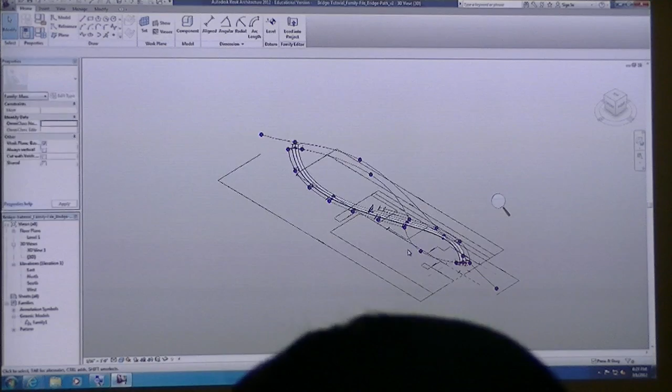Where are your dimensions? That's what I can't get because Y and Z. Oh, like this point, when you first started out. Sometimes, yeah, I guess it's. Like I think all my other points are right and everything. I don't know what's going on. It's just like when I place the point anywhere on the line, it's not working. Yeah, like it just went crazy.

Thank you, great. When you dimension, are you dimensioning to the point or the plane? To the point. You have to dimension to the perpendicular plane. But if I delete these, oh no, when I do those dimensions out, when I did these, it was to the point, yeah, but when I did the actual... Yeah, so you're gonna have to get rid of those. Okay, because right now it's driving, this reference spline is driving that geometry. And it's forcing all of these to also be perpendicular to the spline.

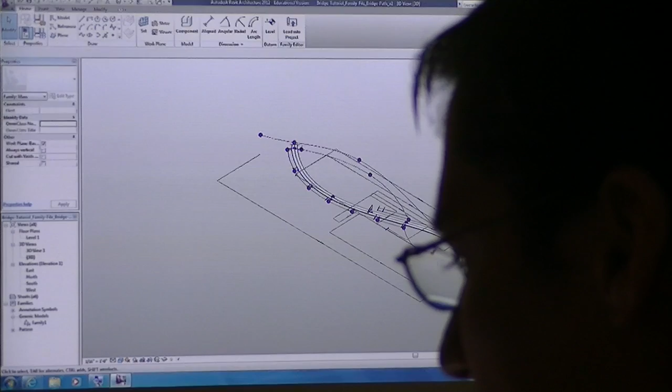Okay, but before you even do this part, every year. I know you, they need to go back and make sure all the dimensions that are being defined as a set of parameters are actually going to the vertical and horizontal planes of the point. Those are going right, but these, just the overall dimensions, those will still be positive, those are going right. So should I just delete those? No, nothing should go to the point.

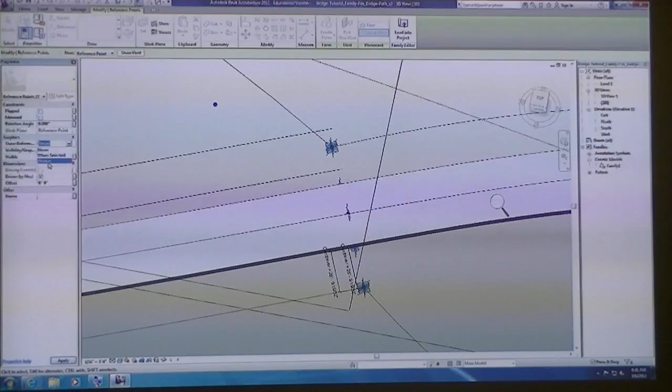Turn on my always option. You have to always be dimensioning to those planes of the point, not the point itself. If you dimension to the point itself, it's going to allow your point to rotate once a piece of geometry, like your section curve or section bridge, starts to sweep across the surface, forcing rotation of that point. Otherwise, if you dimension to the planes, those planes will always stay in the X and Y axes.

So if you're running into problems with a twisting form, or you're getting error messages about constraints not being satisfied or needing to remove constraints, it's a dimensioning error.

Is there a way to fix it after the dimensions? Yes, you can, with any dimension line.

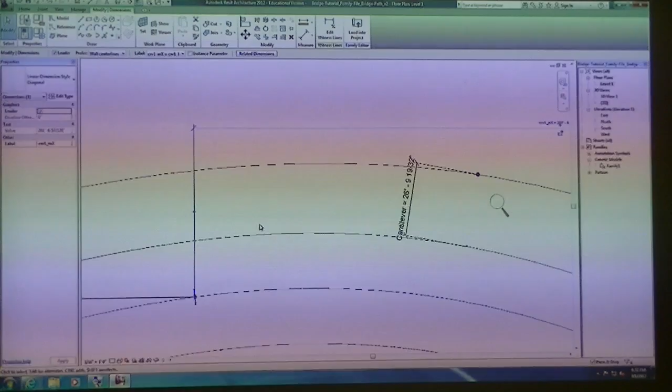If you select a dimension string, you'll see this little point in the middle of one of the extensions. You can drag that and rehost it to a particular plane or point or whatever you're trying to dimension to. If you don't see that handle, like over here, take one of these and drag it, and you'll see that handle again in the middle, letting you redo the dimension.

You can also click on a dimension, and if you right click on that same point, if you had multiple dimensions on a string—though in most cases we only have one dimension per string—you can delete witness lines. The witness lines are considered dimensions. Or you could click on a dimension string and click edit witness line, which allows you to add more dimensions to that string. But to add a parameter to a dimension string, it has to be a single dimension—you can't have multiple dimensions on a string and then try to add a parameter. It won't work.

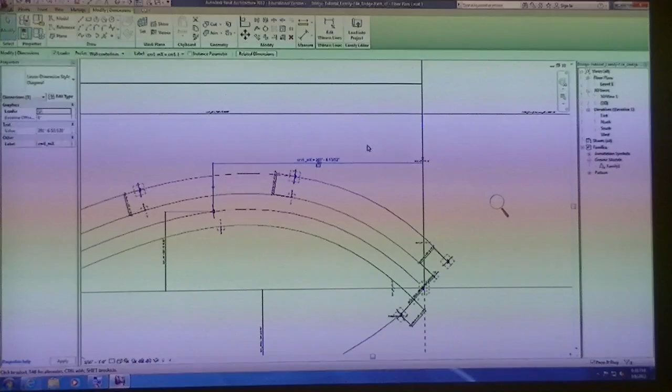I'm going to reload this just in case.

So this file is kind of where we left off last time, but I've completed our exercise. Last time we created these 4 points and made a reference line spline through them with an offset equal to a parameter called cantilever. I then added another curve with more points, since it was a lot longer and needed more than 4 points to work. All of those are set up the same way, with that offset set to cantilever.

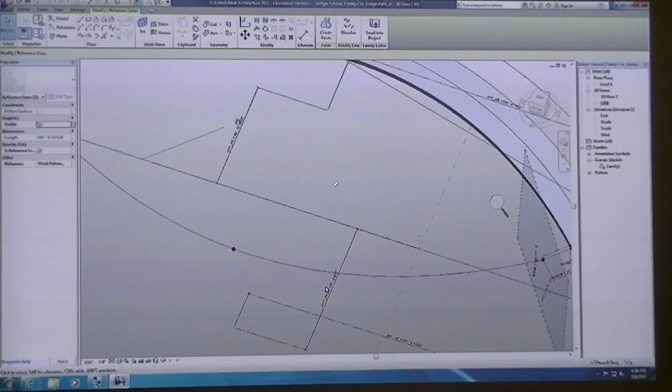Then I made another set of curves by placing 3 more points, and added some parameters to all of these points that have to do with how I want this to actually look, kind of like a crossbow.

And I've got another set of points going in the Z direction. They're all along the main reference axis. If we look at level 1, this horizontal plane, those points going across the top—there are basically 5 points—form a curve that goes up and above the bridge.

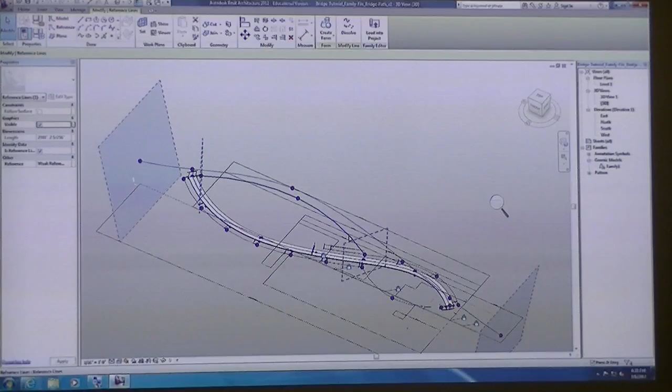All I did with those is create more points and add more parameters. So every way we created the points associated with this bridge, I did the same thing with all of these points: placing new points, adding dimensions, and then a set of parameters to define their location. I'm not going to go into each one specifically, but they all reference some relative position on the bridge—either the bridge spot elevation, the starting point, a midpoint, or some other hosted point already established.

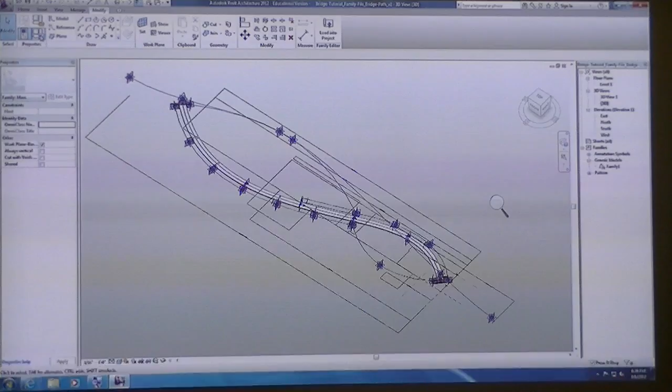This way, if you click on your dialog box and change the bridge length—right now it's set to 1600—you just type in 2000, and everything should grow and expand relative to one another. We can also just go a lot smaller here.

All right, so what I want to go over today is how we're going to complete this bridge. I've got a set of adaptive structural components that we're going to place—not all of them, just get them started. Then I'm going to go over the actual funky foam form, like you have on your bridge, and how to place that, along with a couple different ideas that might help you out.

If you've downloaded all the other files for today's class, go into recent files and open them up. I have 2 files: one called adaptive V structure and adaptive box structure. Let's go ahead and open both. I'm going to open up the box, then go back to view, user interface, recent files, and open adaptive V.

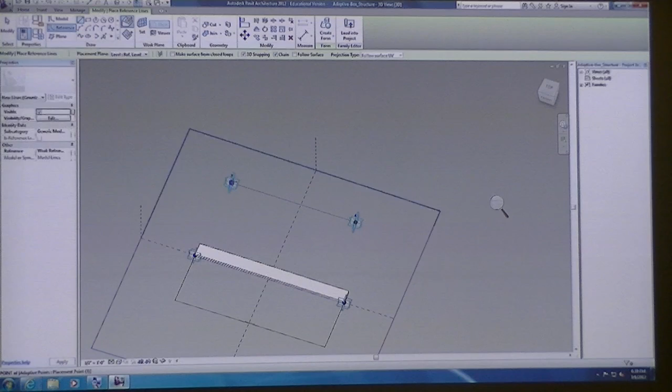Then once I had that line, I just said create form solid. Once you have a solid form, instead of making this into a complete solid, I was having trouble getting all the adaptive points to go around the perimeter and do an extrusion. So I actually made this solid by a series of faces.

Once you make a face, what I did here is I extruded this up, and you can then tab over and select one of the edges and say create form again. I can do the same thing, and of course this one I can change the direction of it from your positive and negative offsets.

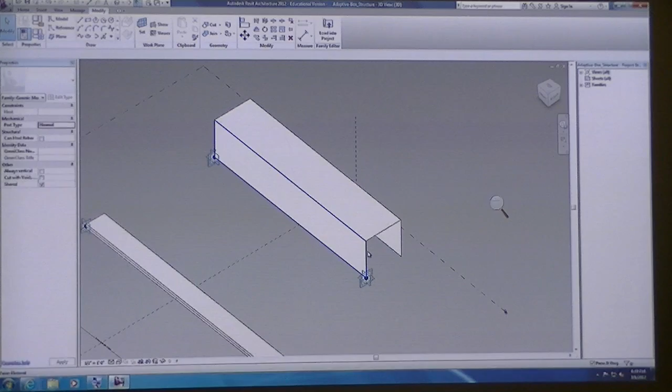Number lock. And so I basically completed the whole entire form by doing this, and then to close it off, you just select both.

Now you'll see that when I selected both of these edges, I now have these 3 thumbnails that popped up. They both look like pipes, but the last one's a flat plane. I'm not sure what the difference is between the first 2.

And then I did the same thing to close it off. So I basically made this whole box in a series of faces, kind of like you might do in SketchUp or even in Rhino from time to time to make that solid.

I'm going to delete all that.

The next thing I did is I took a dimension line, and did a dimension from point to point. Remember, I just got done saying you have to dimension to the planes of a point. Well, in adaptive components, you have to dimension to the point itself, because adaptive components will be rotating. Those points will be rotating, so we can't force it into locking into those perpendicular planes.

So I actually snapped to the center of each of these points, and set a few parameters up. One of these is called structure width, length, and depth. I also added a material parameter. But one of these parameters, and they're actually all defaults, meaning they're all instance parameters.

One of them is a reporting parameter called structure length. And that's what you see highlighted, and is actually reporting what the length of this structural element is going to be from point to point.

The reason I did that is I want a parameter set so that the size of this box is being developed by the overall length of this beam. You all remember from structural classes, or even just in studio when you're trying to show some realism to your projects, there's one of those magic formulas where you take the overall length of how far you're spanning a beam.

You convert it into inches, and then add 2 inches or subtract 2 inches, or some kind of rule that gives you a general depth of what a beam might look like realistically, so you don't have to do all the structural calculations. So that's what I set up here.

I basically just say structure length divided by 12. That makes the depth, turning this from feet to inches. And then I did my structural width. I just came up with some obscure multiplication of 0.175 that gave me a particular thickness or width to the beam that I wanted.

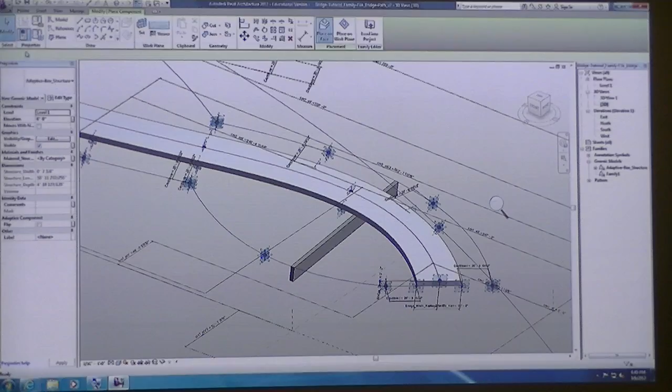Would it always do it perpendicular? It's going to be, when you start to snap this to the different points, it won't exactly be perpendicular. It looks like it is, but from time to time, especially when we get to this next adaptive component, you'll see that you may have to hover over the adaptive point, and then you can move it by dragging it.

Or you can also move it by your normalized curve parameter. So right now that point's located at 0.57. I could type in 0.6. So if you need to make any adjustments once you actually get this component placed, you can just tab over and find those points and then move them.

Now once we have one of those placed, we can hold in the control button and select or hover over that item and then just drag. By holding in that control button, you're basically dragging and dropping each of these, or sliding them up and down the different reference lines.

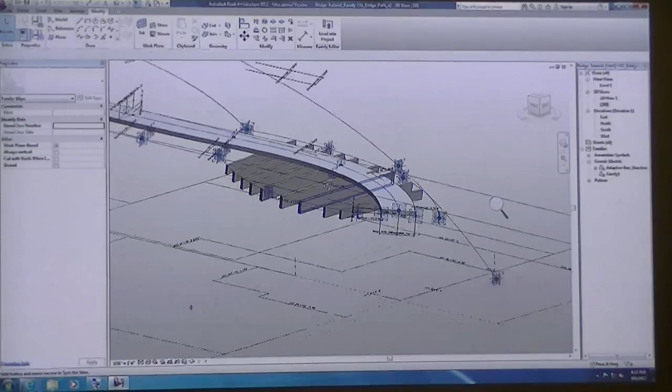If my beam is connected on the bottom and kind of goes across like yours is on the bottom, but mine is connected by the top.

Okay, so you can click on the beam, and under adaptive component, you can hit flip. It probably had to do with the order that you snapped.

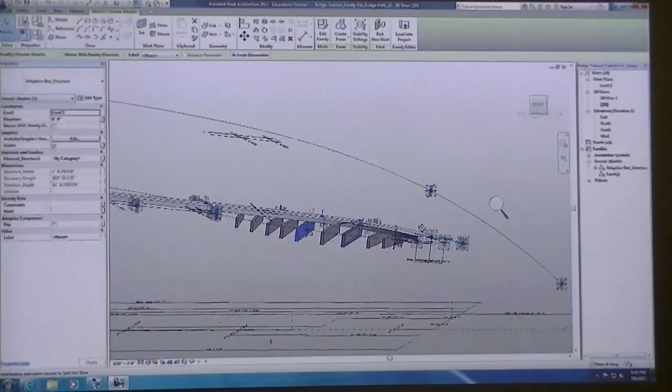And so when you kind of rotate around, you should see that as the beam starts to span less, the depth is also changing. So all the depths are not exactly equal, and that's because of that reporting parameter.

Now you might say, well, so I can drag all these, but how do I actually get them kind of equal, and try to have some sort of logic to their spacing? Once you actually place an adaptive component...

If you go into a floor plan view, while we're in the floor plan view, also highlight level 1 in the project browser, and then under view range hit edit. Change everything to unlimited except for the cut plane. Let's go ahead and just make that like 2,000 feet, just to make sure we're well above.

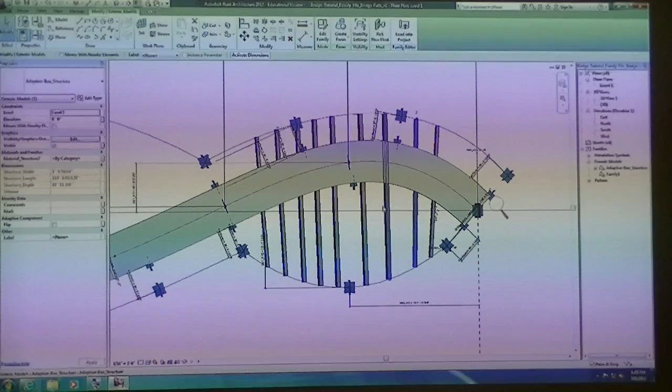And if you don't like the thickness of how far these beams are going in depth, and also how wide they're getting, you can just go back in and adjust the formulas that I have within the adaptive component. I kind of think they're a little thick right now, but we'll worry about that later.

So once you've actually placed these beams, what we can do is draw in the floor plan a series of reference planes. So under the top here, click on plane, and we're going to draw a line.

And I'm going to snap to the endpoint and draw a vertical line. I'm basically going to make a series of guides. The next plane I draw, I'm going to snap to the other end. I'm going to call these kind of my construction lines right now.

What points are you selecting? I'm just snapping to the endpoints of this curve.

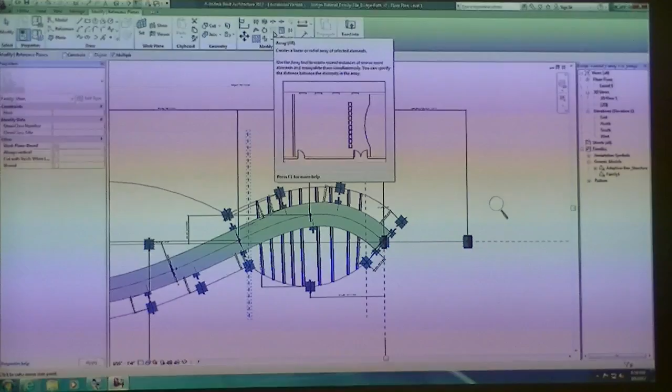And then if you take one of those planes, I'm going to copy it. So hit modify and copy, and then make sure multiple is selected. You cannot array a series of reference planes or reference lines, so that's why it's grayed out. Unfortunately we have to do this by doing a copy and multiple.

And I'm going to copy a whole series of these. I don't really care what the distance is at the moment between them. And then if you dimension to each one of them with the align dimension tool, when you're done, you can just click on equal, and it'll make it equal, equal, equal.

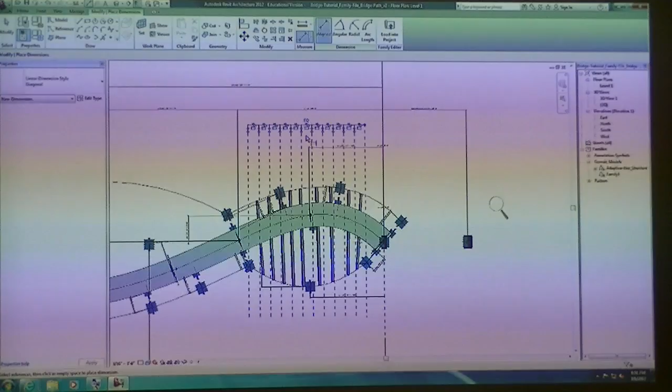Now, I'm not going to do all of these beams, but once you set up this adaptive structure, you're going to have to do a little bit of work in creating your alignments correct, or the way that you would like to see them in your design. So I would like all of my beams to actually be vertical in this plan view.

Since when I drag my adaptive component, basically it's trying to connect the normalized curve parameter value equal on each side of the curves, and because my curves are different lengths, that's why you end up with your adaptive component starting to kink to one side or the other, because it's trying to connect the 0.78, and this one's probably, well, that one's 0.95, but it's trying to be close anyway.

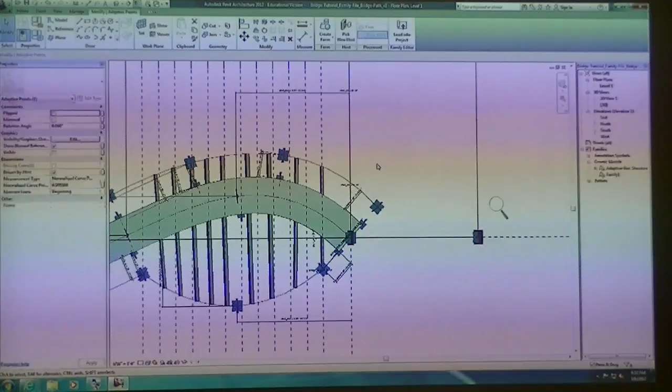But once I have that, what I can do is I have these reference planes as a guide. I can then drag the point. I have to tab over to select that adaptive point. And I can get it fairly close to the location I'd like to see it in. Once you have this hosted and it's actually connected to these reference lines, no matter how your bridge ends up changing, it's always going to remember the normalized curve parameter value of where those adaptive points are located. And so those beams will always be at those locations once you have them set.

I'm just going to do one more here so you can see. So I tabbed over, I selected the point of the adaptive, and I'm just, you can't really snap to the intersection of these planes, but I can at least eyeball it and get it fairly close. And you can also use your cursor keys, left and right, to move the point if you just want to nudge it over a little bit here and there.

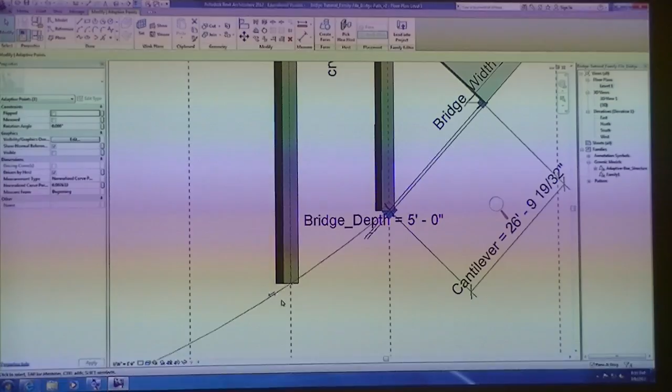So anyway, you kind of get the idea there. You can determine how many beams you want. These reference planes, they're just there for this alignment exercise. Once we're done, we can select them all and delete them. They're not really serving a purpose other than a visual overlay at the moment.

But if we go back into our 3D view, I want to go ahead and place these other adaptive components. So I might hit save. And I'm going to flip over into the component called adaptive V structure.

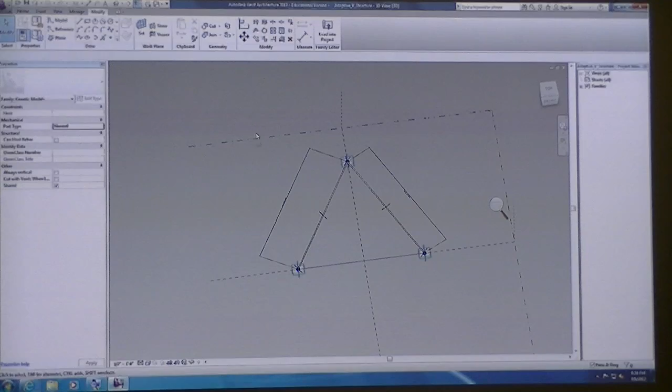And I could have made this all into one component. I might try that again, but I was having some difficulty with the beam versus this component and getting it to flip in the right direction. So that's why I made them into separate components. So you may have to kind of break down your structure a little bit to get it to work correctly.

For some reason, when I actually had the beam down here, when it got placed onto the bridge, the beam part flipped up above the bridge, but then my V was still upright as well, and I could never get it to flip correctly. So that's why it's broken up this way. So adaptive components, they're not perfect, but we have to find a way to work around them.

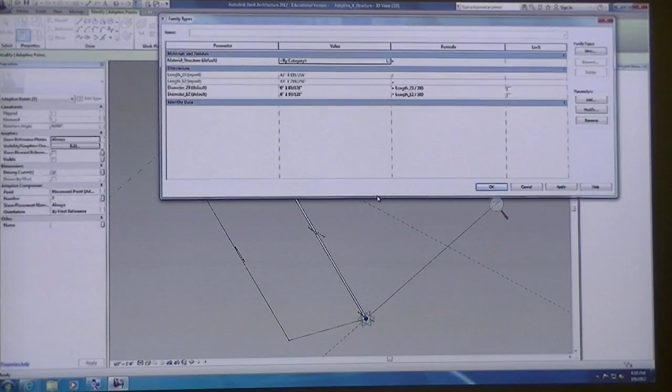This particular structure is set up like basically a series of cables that are moving from 3 adaptive points. So I made a triangle, and there's a series of dimensions here as well. They're all reporting, there's 2 reporting dimensions and 2 instance dimensions. I'm basically finding the length, the overall length between each of these points. So point 1 to 2 and 2 to 3.

That then determines the thickness, or the actual radius of the pipe. So if you look, I actually called it diameter. It should really be called radius. But anyway, there's a parameter here that's set to the actual thickness or the dimension of that pipe. So basically, as the length changes, the thickness of the pipe should also change as well, just for some more variation. We can go ahead and load that into the project.

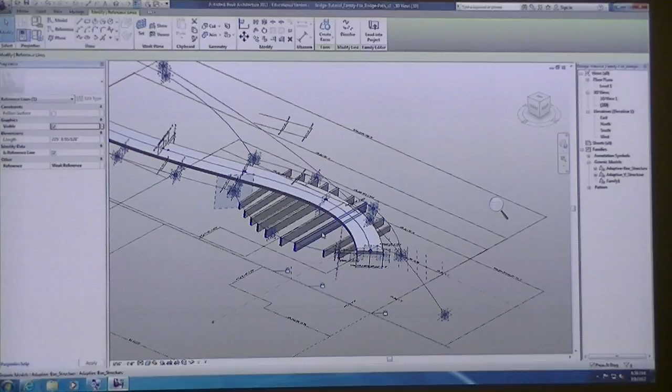If we click into a 3D view, basically what we want to do is we're going to connect those 2 reference lines that we just connected with our adaptive structure beam, that box beam, but we're also going to include the wire that's up high as that center point. So I'm clicking on Place Component, and because we now have more than one component selected...

If you click on that kind of big button off to the top left under Properties, you'll get a pull-down menu now that shows you all of your different components that you've loaded and what you can place. So I'm going to make sure I have adaptive V structure. And the order is, we need a low point. So I'm picking a point here on this kind of bow. And then I'm picking another point up high. And then I'm picking a point on the other side.

And so this works in the same way. Once we place one adaptive component, you can actually just hover over it, hit Control, and then continue to slide this.

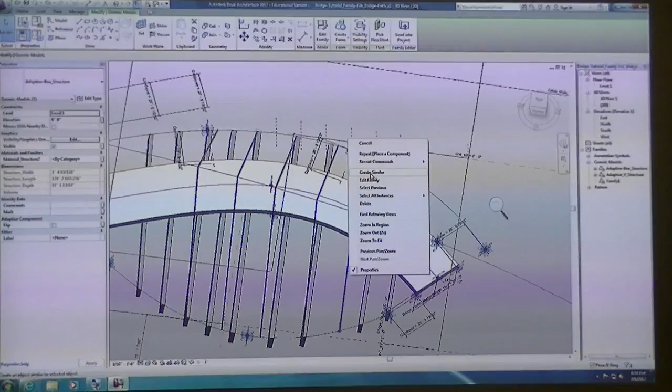Now what I probably should have done is, if we had all of our beams set exactly how you wanted them, you know, gone through the whole exercise and aligned all your beams to be vertical in the plan view. When I place an adaptive component, I'll right click on one of these and say create similar, just so I can make another one. I could actually snap to the point of another adaptive component, so I could snap to that, then up here, and then down on the other side.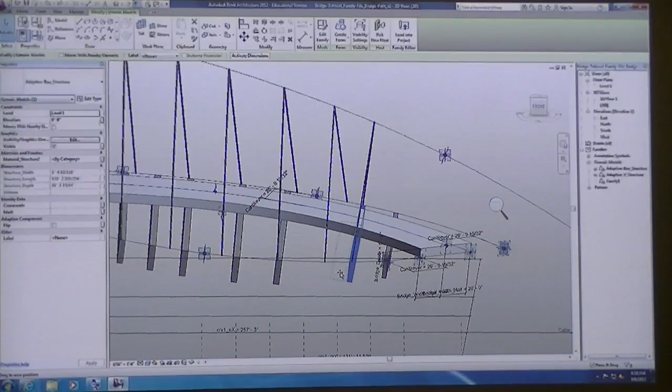At least it'll be aligned to all that work you just did to get the other beams aligned. It doesn't form a connection between the adaptive components though. The adaptive components always form a connection to those reference lines. So you can see after I snap to those points, if I drag the beam, the other adaptive component doesn't move with it, because these points are being hosted by those reference lines.

So that's a quick and easy way to add some tectonic structure to your path, so it has some realism of something holding up this curvy path that's spanning close to 2,000 feet across a waterway. I chose to make an arc above and have a suspension bridge. I could have also had an adaptive or reference plane underneath, with structure coming up from below. You can decide how you want your structure.

I think I emailed you guys some images. I don't know if you got it, but just some quick inspiration from an internet search on complex bridges. You can see some of the forms. Let me load one up real quick. That was kind of my inspiration for what we're going for here.

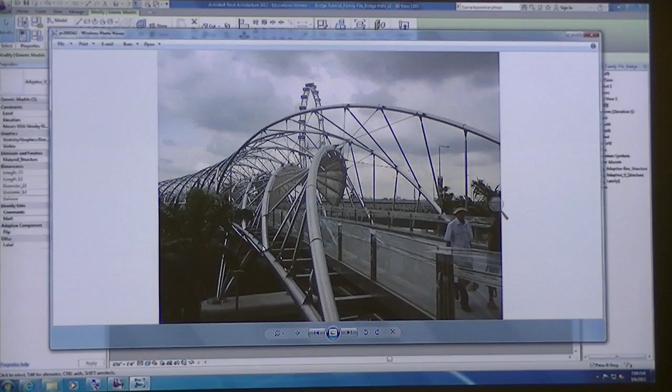Obviously this one's a little more complex, a lot more parts and pieces, but it's pretty nice, has some glass panels in there eventually. Then you can also see there's structure underneath. So you can get as elaborate as you want to.

So you guys can get as creative as you want, but as long as you follow the rules with the adaptive points and making all these different components, as long as you have these reference lines, you can add as many of these structures as you want.

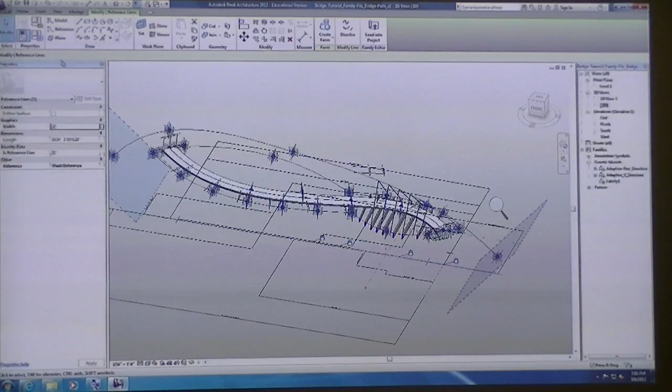Now that you have all these set, if we come back into our properties and change our bridge length, so I've got 750 feet typed in now, I'm going to change it to 2,000. It's going to take a little bit longer to generate, but you can see it's stretched, and all of the structure stretched into the exact location of where it was in the normalized parameter, or that curve parameter along the reference lines.

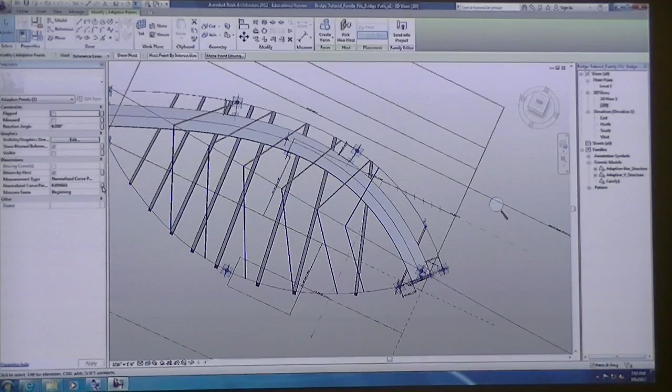So it moved my... somehow it moved that guy. Why did it do that? I kind of kinked all of my structural elements. Didn't do that earlier, of course.

Well, the point would be, at least you can find the overall length of your bridge that you're working on, and probably to lock this in place... I wouldn't want to have to do this, but you'd have to come in here, and there's no way to lock that normalized parameter unless you associate it with an actual parameter that's already established. So you probably don't want to do that. Anyway, you'll have to play around with that a little bit. It's not going to be perfect.

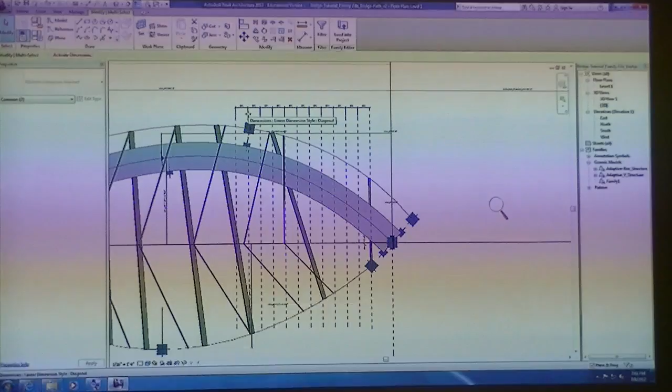Maybe if I delete, hold on a second. It's possible, since the lines are different lengths, that one might get scaled longer than the other. So it might be the same point on that line, but it might be larger than the other one. Yeah, let me see if it's still on the same... so it's 0.894, and if I change this again... oops.

Yeah, it's still on the same point. It's just those are being scaled up and down.

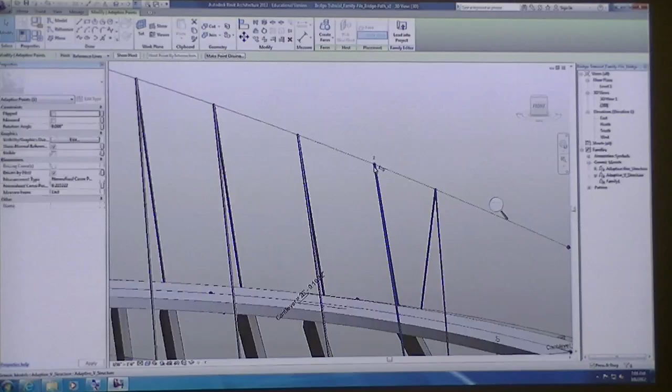Is there any way to keep it from rotating like that, like when we're copying them over, they angle a little more in general? No, so this one that goes up and above, as you copy them over, you notice it starts to angle over. You'll have to tab over one of those points and move that one point into place. So I would do that in level 1.

Is there a shortcut key in Revit to stay orthogonal? To do what, besides using the guides? A shortcut key for what? To stay perpendicular or? Not in this case. There is for various snaps and things like that, but it's not going to do it for the adaptive component.

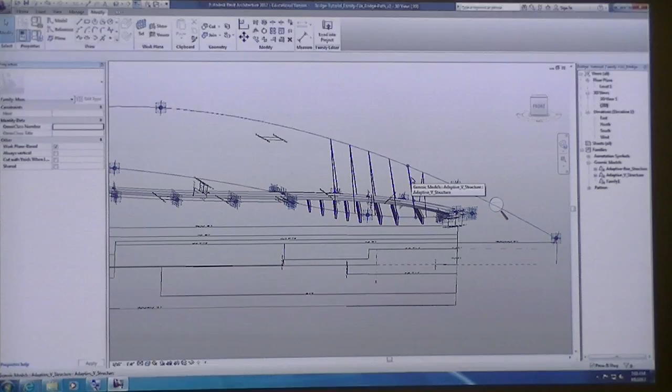So would you say it's probably best to figure out how long our bridge needs to be, and then just keep that length locked in there? Probably for now, with the theory that obviously you could adjust it, and you might have to do a little bit of legwork.

The other method could be, I could actually create a surface and then divide it. So that might be a possibility too, where if it allows you to make a surface, you might be able to come in here and do a divided surface and then apply a curtain panel to it to give it some structure.

So you might have to play with the way the grid is rotating and so forth, by all those different parameters off to the left. I've seen it done both ways, and I suspect those two images I just showed you are probably a combination of these two. So you might play around with whatever works best with your particular bridge to add some of this tectonic structure to it.

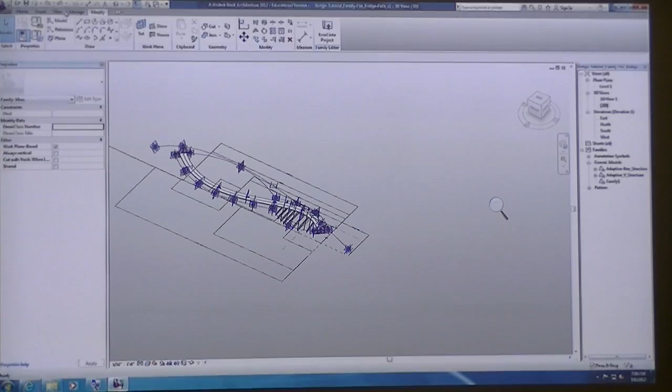The last item I want to do is let's go into our view and user interface, recent files, and go ahead and open the analog to digital translation file.

This is everybody's infamous canopy curves, and we've all set them up the same way, where I believe you basically found a point referenced on your bridge, your actual analog model. That was probably some corner, and that's the way I did it as well. And then you have all these X, Y, and Z dimensions that defined where each of the points are located. In your family types, you had all your X1, Y1, Z1, and so on, probably 10 points or less or more.

The issue is that you built your curves based on some assumed dimension and length of your bridge. So when I scaled my bridge, my overall length at 16th scale was 240 feet. And so all of my points in between are some point between 0 and 240 feet, and that defines the actual scale and positioning of all those points in that canopy structure. So what we have to do now, because these points are set up this way, is actually find a method to scale it.

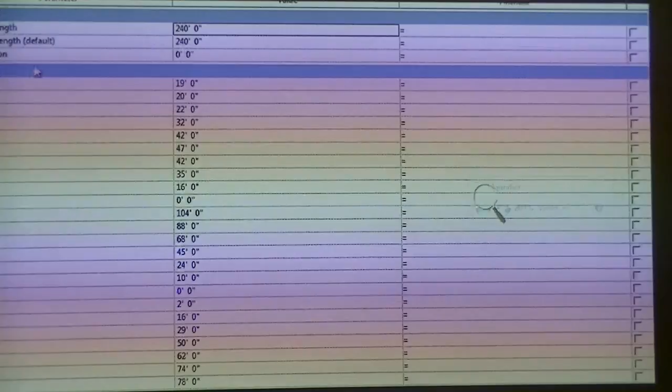Up at the top, you'll see that I have some constraints. One is called total initial length. I have that set to 240 feet, because that's what I assumed my bridge was going to be at one time. I added another parameter called total actual length, and that one's an instance parameter, so it has a default. I also set that to 240 as well, just to keep everything the same for now.

Now, because when you change from curve to curve, I can't put in any formulas associated with these dimensions or these actual points that were first established. If they are changing from one form to another, all these different family types, if I enter in a formula, the formulas always stay consistent from family to family. You might have noticed that if you've experimented a little bit. So basically, if I put in a formula here, no matter what I change, that number would always be the same. So what I want them to be is different for each family type.

And so I created down at the bottom an equivalent parameter for each of the points. So unfortunately, if you have a lot of points, there's a lot of parameters to make, but I spent 15 minutes and set all this up real quick. I basically called them whatever the same point was called up here, and then I just put an SF after it, for scale factor.

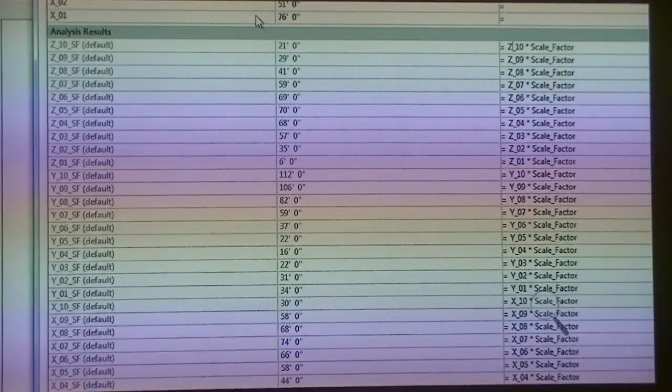Then down at the bottom, zoom out. I set up a scale factor instance parameter called total actual length divided by total initial length. That will give you, right now, a value of 1. So as that number changes, you'll have a scale factor where it'll either scale up or down.

After this, I'm also going to talk to you a little bit about maybe another method of how we could have set this up. But since we have this all set up this way, this is the way that I found to make it work so far. You had a question, David?

Well, remember, if you just do this in one family type, if it's a formula, the formulas are consistent from family type to family type. You have to do it on the original curve though, I think, because otherwise it won't set.

That is what I discovered when I set up my bridge. What do you mean? Like whichever curve you made on here first, like whichever family type, if you don't set it up on here, it won't apply, it won't save once you cancel out of it. Isn't that the problem we have, Kristen?

I've no idea. It should. It's possible that it wouldn't let you. Did it give you error messages about type parameters trying to reference an instance parameter and things like that? I think it said it was trying to, like curve C trying to reference curve A or something like that. Yeah, they were trying to reference one another, but we weren't doing these parameters. We were doing something else, like the bridge path.

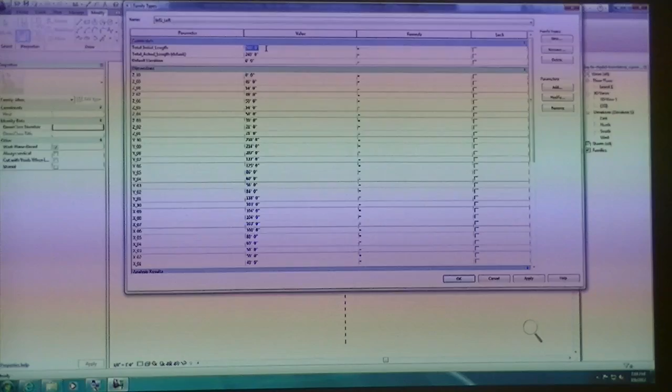I don't know why, but if I did it in a different order, like if I started over again and then did this in a different order, I got that error message. So the point is, if this is causing you an issue, it works for this particular file, but this might have to change to an instance parameter, and make them all, anything that's in a formula, make it all instance parameters. The reason I kept it as a type is I wanted the 240 feet to always stay 240 feet, because from every single initial curve that I set up, it was all based on my original model.

Okay, so I have all of those. I'm going to load this into the bridge project.

These don't have reference points, correct? So like, we did these curves and then we set them up to a reference point. Is this pre-setting up to reference points, like these are the original files? Yeah, these are the original curve files before they got hosted into another family. Okay, so you might want to go back to that standpoint.

Now, my path example that I've been showing you doesn't reflect my model, because I just kind of did this real quick in my head without my model. So when we place these canopies, they're not going to align perfectly, but they would if I had actually measured out my path and we were actually working with this path during class instead of one I made up.

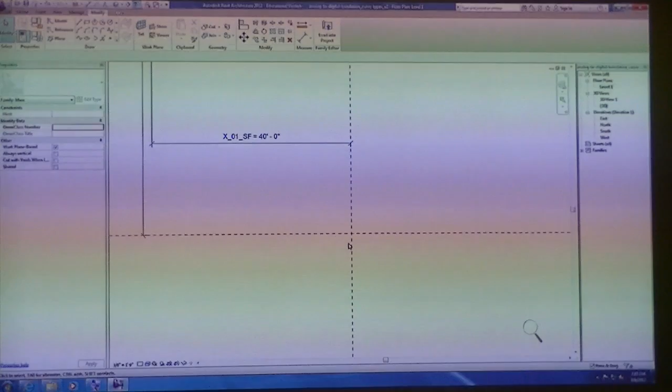Now, I'm just going to flip back real quick into that curve type. All of these are being referenced from this origin, right? This center origin of where these planes cross at that 0, 0 origin, that's where all of these different points were located from.

When it's in our bridge file, we want to set up a point that's going to act as that origin point. So I'm going to get into a plan view and click on a point element, and hover over this vertical reference plane, the one that's dashed right here at the 0,0. I'm just going to put it some distance above the bridge, select it, and turn on all of my planes.

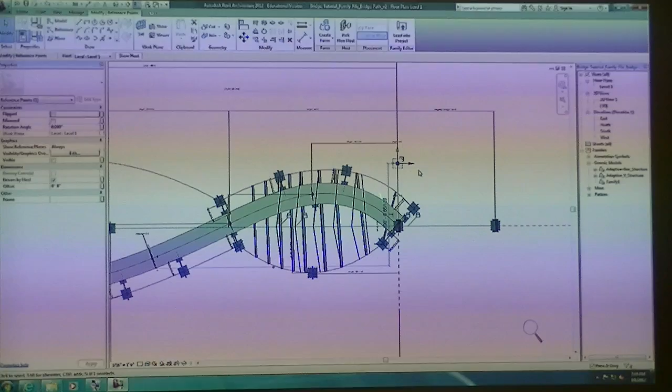Now the reason I put it above is when I'm looking at my original file, everything was going up and to the left. So right now, if this is imagine that as the crosshairs, my curve is going to be going up in this direction. Okay? I'm going to explain a little bit more here in a second.

What we want to do is under Home, click on Component, and you should now see the ability to select that analog to digital translation file. And we're going to want to place this on a work plane. So this time I'm going to say place on work plane, and we need to pick...

May have to be in a 3D view. Yeah, you need to be in a 3D view, sorry. So do that again, go in 3D view, do Home, Component, place on work plane, and then we get the option to pick a work plane.

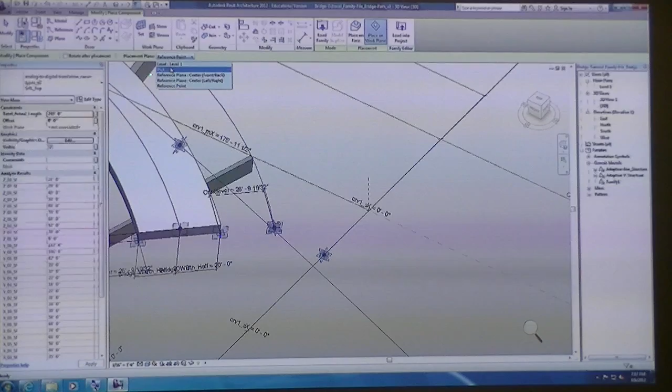We want to pick the horizontal work plane of that reference point. Then it's going to want you to place and snap that point, and you can see the cursor has that relationship to wherever that reference plane was or that origin point was in the original file. I want to snap to the center of that point.

So in that case, I placed the surface one top.

Let's go ahead and do that again. Home, Component, but this time choose surface one bottom, or if you need to pick the opposite one, whatever one you placed first. And I'm going to do place on work plane, pick that same horizontal work plane of that point, and also snap to the center of that point.

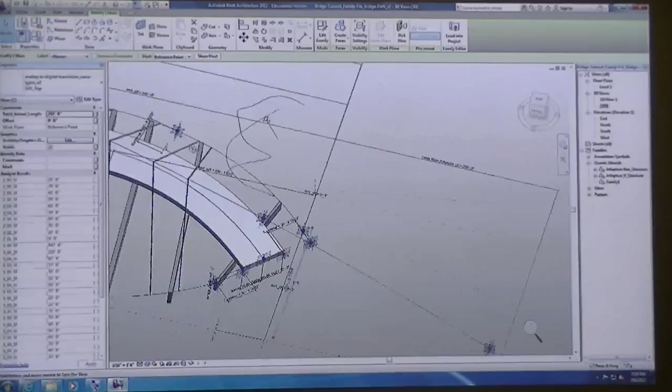Whenever I try and bring in one of those surface curves, it's snapping somewhere to like the center of my model. It's not allowing me to kind of snap over the point that I placed.

Do you have a place on work plane? Yeah. You may have to rotate around a little bit in the view, see if that helps. And you might want to move your point further away from the bridge, maybe. Well, it's like it's already snapped somehow. Like, see this dimension line? It's like it's already snapped to a point somewhere in the center of the component.

So, snap a point here. I'll go to make sure you then pick that horizontal plane.

Yeah, the scale. You were trying to, it was wanting to put it on the level 1 plane. Oh, okay, so that's why. Awesome. Good effort.

All right. Does everyone have those two curves? Yes, no? Okay.

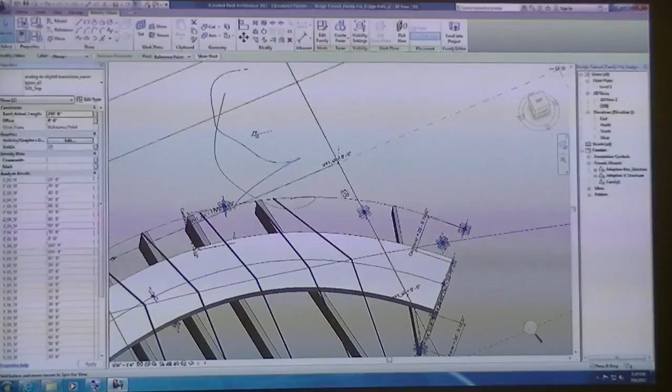Now, you'll notice that our bridge is going off to the left, but our curves are going up to kind of the top left, just like our original file for those curves.

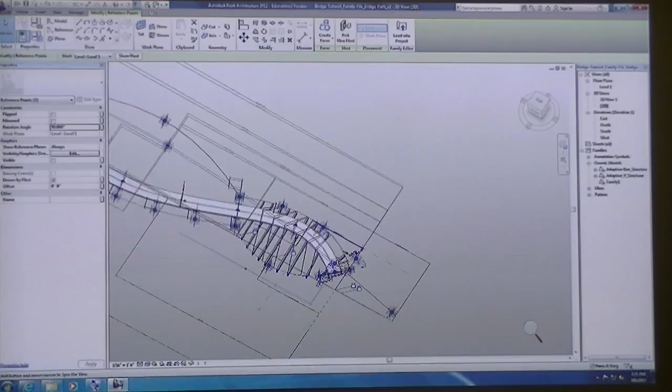So what we want to do is select that point, and under rotation angle and properties, go ahead and just type in 90. It will rotate those curves to be in position and going in the same direction as our bridge.

Okay, last step here for these curves is if you select one of the curves, look over to the left in the properties, because we made the total actual length parameter an instance parameter. It is over here, meaning that we can edit this parameter here in this file. But what we really want it to do is equal the overall length of this bridge that we're trying to place it to. So right now it says total actual length is 240 feet.

If I click on this button to the far right, we want to set this parameter to say bridge length, and then hit OK. Do the same thing for the other one. Click on that button and then make it equal to bridge length.

You see how those now just scaled up to be in relationship with the actual scale of this bridge. And then we can select both of the curves and say create form solid.

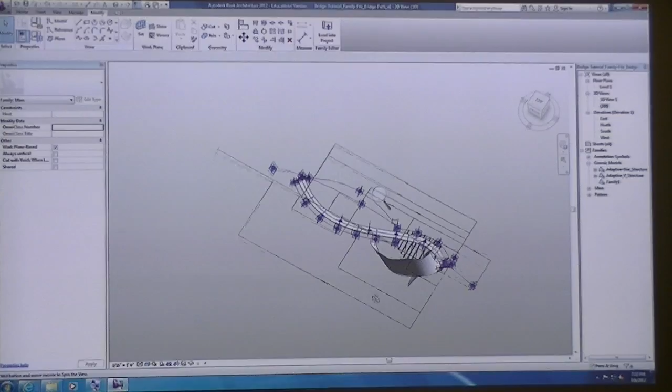What if like our path kind of changed slightly because we adjusted it and it doesn't fit? Go over that. So once you have that, if you type in a new bridge length, maybe I'll say 2,000 feet.

I will see this actual canopy structure also scale up as well. Now the only thing we have to do is this reference point that we've placed right now is just free floating, and it has no relationship to the position of the bridge as it grows.

So what you want to do is go back to your original model, and you need to come up with a scale factor of how far away that point is from—remember we set this bridge up to have its origin point at those reference planes right there at the middle of the path, the start point of the path. Since I'm trying to now measure to this corner, my original dimension here was something like 63 feet when it was at 16th scale, if you guys are looking back here real quick.

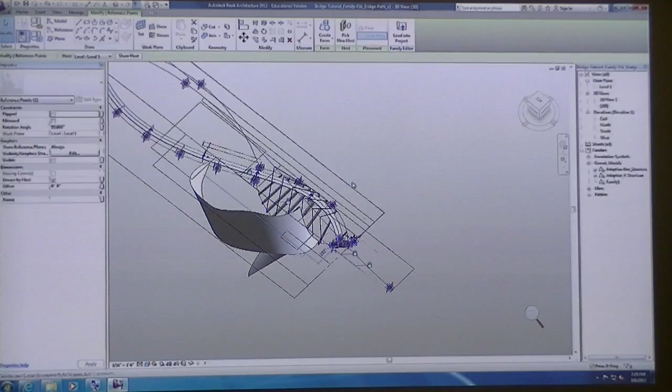Where do you set that up? So like this point—right, we have this point that's already placed. And I'm going to draw a dimension from the reference plane, and in this case I really do want this to be to the point, not the plane, because we just rotated that point 90 degrees. We have to now just snap to that point.

This way we could always rotate this point again. We could rotate this point. So it's 90—I could make this a 45-degree angle. And you notice I don't get any kind of constraint problems.

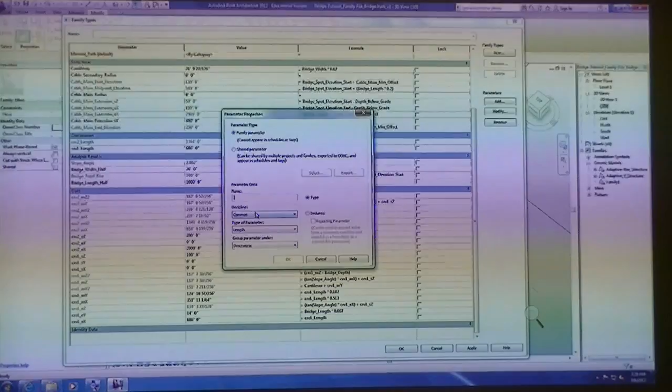Now in the family types under properties—I don't think I have it in here—I would want to set up a parameter. Let's add a parameter called, I just call it like Y align or something like that. I'm also going to group it under analysis results just to keep it separate.

And I'm going to set that dimension string to equal the Y aligned value that we just created.

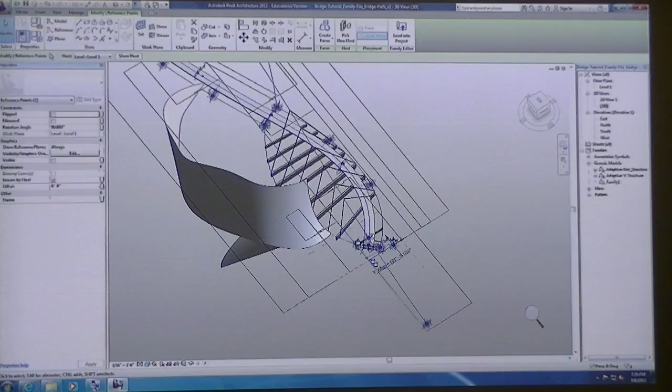Then what I might want to do is find out where this point really needs to be. So if I had a scale factor and if I had everything aligned correctly, if I had the right path in there in my actual canopy structure, I could just come in here and give it a dimension that said like bridge length times some kind of formula. So I could type in 63 feet divided by 240, because that would give me my scale factor of my original analog model, and that would be the value that I'm using.

But some of you, and even myself here, might have changed your bridge path design, and you haven't changed any of your canopy structures. So what I'm going to do is find out a location of actually where I want this canopy to occur. I'm going to delete this dimension for a second.

If I take that origin point and I move it, I can drag this form around to find out where I'd like it located before I start to assign parameters to it. I could also come over here and hit flipped—you could flip it around. I could also rotate my angle.

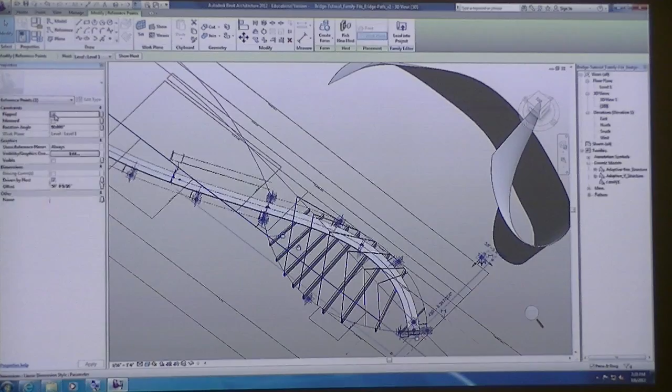So maybe it's not the full 90 degrees, I could play around with the angle. Maybe this is something more like 310 degrees. So you can play around with the position of where this point is located to change the location of your canopy structure.

And so you might have one reference point for every canopy surface that you have, unless you've got your path and everything matching up pretty correctly. But you see I kind of flipped it around, so I rotated my point 310 degrees, and I moved it around, and I've got a form that I kind of like that actually works with my new path.

Once you do that and you've located where that point needs to be located, that's when you can come here and start to snap your different dimensions.

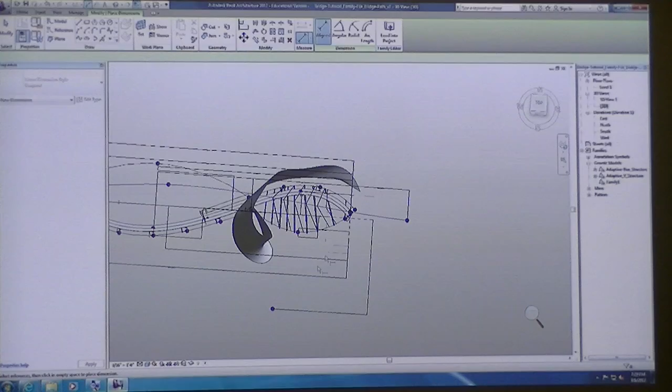And then I'd want to come up with some—I'm going to change my Y align to 0 again. If you have your parameter set to 0 at the very start, when you assign it, it takes on whatever the value is of that dimension string. If you start off with a dimension in the parameter, it forces the dimension string to that dimension.

And so since I don't really know what all those dimensions are for that point, I'm going to make all this at 0. I'm going to do another one called X align. And then I'll do a Z align.

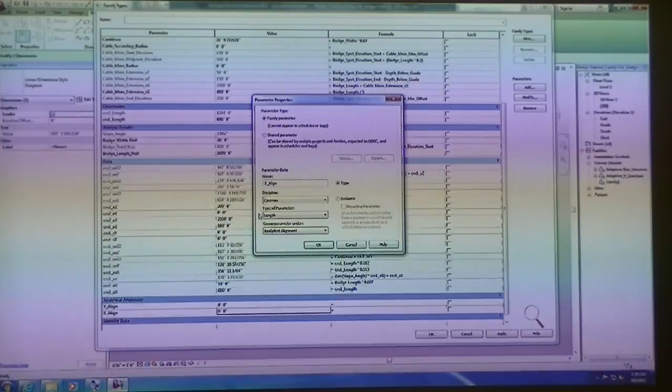Then if I select this point, my Z is the offset. Then I can set these dimensions. This is my X align. This one is my Y.

Now that I have those values down here, I could come up with a formula. So if my bridge length is 2,000, let's say bridge length times... okay, pull up our calculator. I'm going to round it up, just say 654 divided by 2,000. That's my scale factor, 0.327.

Do the same thing with all of these. Then now, because it's associated with a part of the bridge, which is the bridge length, you can see that bridge length can drive a lot.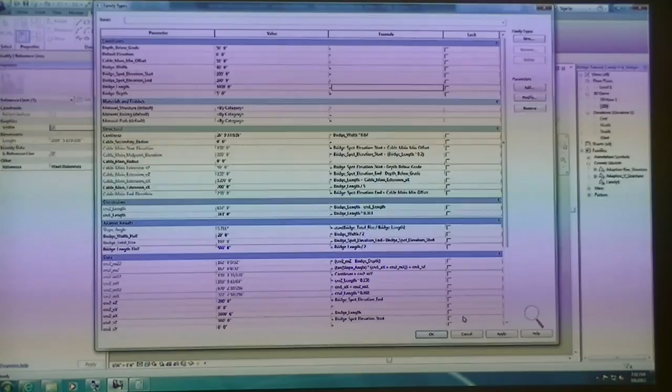Get kind of close. So now when I change my length, everything should scale, and that point will also move. And you can see it still looks correct, or close to correct.

Now you're going to run into a few issues, because if your bridge starts to slope up and down, your bridge could end up sloping above and through the canopy. Right now I've only set my canopy to be in reference to a particular bridge length. So maybe my bridge Z, right now I had it set to 0.

I might want that set to bridge some of the z-axis parameters. So bridge spot elevation start, since it was set to 0, maybe I want some value here, just typed in like 00006 or something. This way if my elevation of that start point moves up, 640 feet or whatever, my canopy reference point will also move with it.

Okay, that's a method for getting all of those to work. If I had to do this over again, because this is all kind of exploratory and experimental stuff we're working on here, I probably would have, as we documented the position of all these curves, made it relative to some point actually on the bridge, maybe like a center point. Let's say this canopy structure, I know it's kind of in the center, so maybe I should have set up all the X, Y, and Z dimensions based off of that as my reference point, and then set up another set of curves with a reference point over here, something like that.

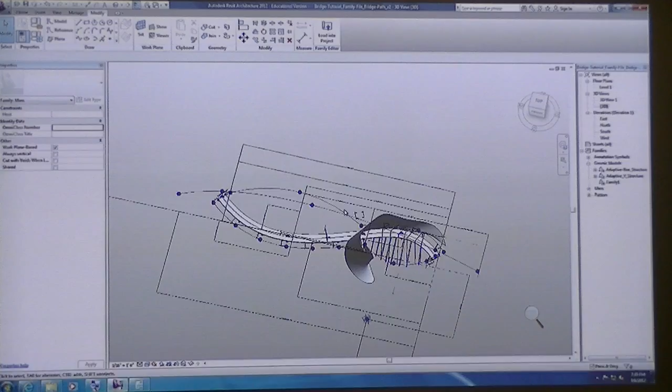The last step is, okay, we've done all this, we need to bring it back into our Revit file. I'm going to set my bridge length back to 1,643 feet 8 inches, because that's what our original length was that we found on the actual topography surface. So 1,643 feet 8 inches. Do we change our elevations?

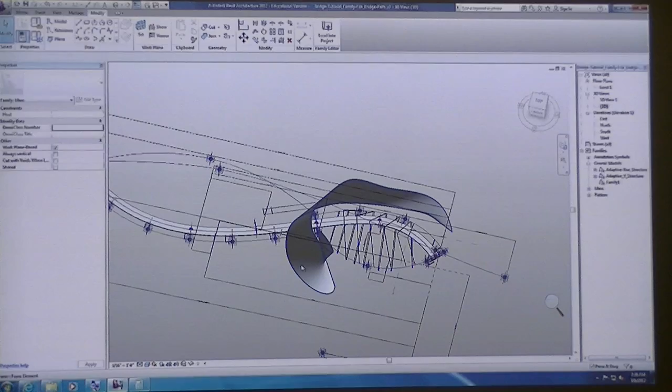No, we don't have to do the elevations yet. You can actually keep the elevations how they are. Click OK, let this thing grow and do what it needs to. I'm going to save it.

And now under View User Interface, we're going to open up a project. Did you guys download from class 14 that bridge tutorial site model, the RVT? You guys have that already downloaded from class 14? Open that. If not, go ahead and download it from here.

So I'm going to open up that project file, site model. Remember this is where we started?

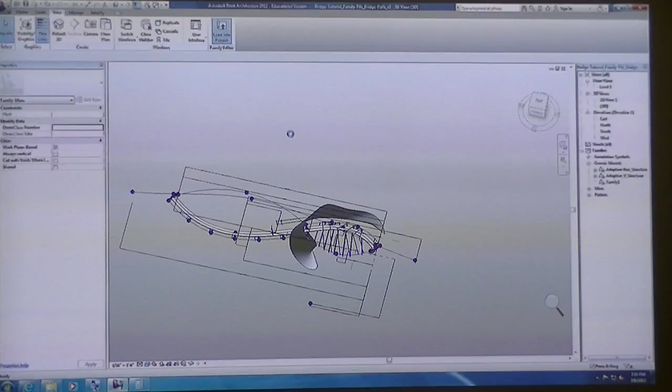So if I take my bridge tutorial, this actual bridge, and load it into my project file, give it a minute. You're going to get that message that you have to turn on your masses. It does that automatically, and then I'm going to place it on a work plane.

By default, it says place on face. We want to place it on a work plane, and we want to make sure it's being placed on datum 00. Remember the datum 00 that we set up? That's just basically a level that's on the 0 elevation mark. Then I'm going to snap to my start point.

When you zoom back out, you're not going to see the bridge anymore. Turn on your wireframe, it's down below the topography surface because we just placed it on the 0 plane. It's also rotated, so it was horizontal while we were working on it to that reference plane.

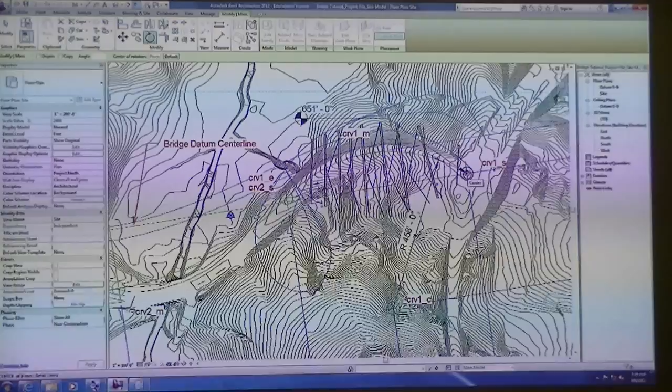So we need to select it, click on rotate. Remember, you have to move your rotate icon. I'm going to go back to this point. Then if I hover my cursor kind of in the orthogonal direction, you'll see that it will actually pick up that reference plane from this actual bridge file that was horizontal. I'm going to click on that, and then rotate down and click on this other green line that was representing how this bridge was going to be rotated.

Then the last step is we have to move it into place. If you remember, you can zoom in, we tagged with our annotation callouts spot elevations at the start. The start was at 651 feet. If I go over to the other side, my end was 642 feet 4 inches.

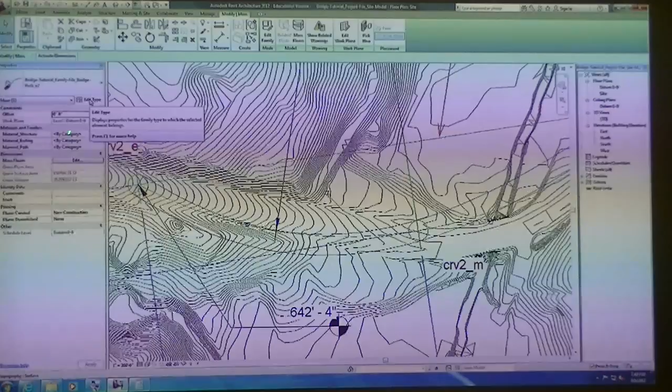So if I click on my bridge that we just placed, you can now go into Edit Type and change your bridge elevations, the start point to 651 feet, and my end point is 642 feet 4 inches.

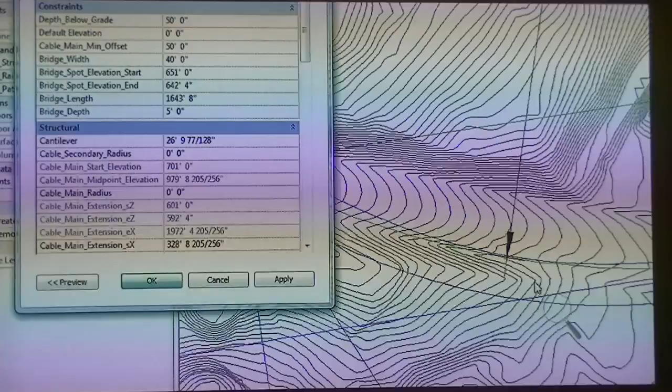See all that? If I hit OK, it's going to think a minute. And if I turn on my shaded view, there's my bridge. Turn on my 3D. It looks like a fish coming out of the water.

Now, something's wrong with my canopy reference point. So I need to go back in and actually figure out that position of where it needs to be in the Z relative to some position on the bridge. But also notice that none of the actual pipe or the rails come in because those were reference lines. Reference lines won't show, so we need to give that some structure.

I'm going to go back into this bridge file. I'll give you a quick little tip. Once you get this part of the bridge working, where you have all of your reference lines, your points, your adaptive components in there, and your canopy structures working to some degree...

I want to make these pipes, make like a pipe structure, to actually give some thickness to all of these reference lines so that they show up in the project model and I can render them in view.

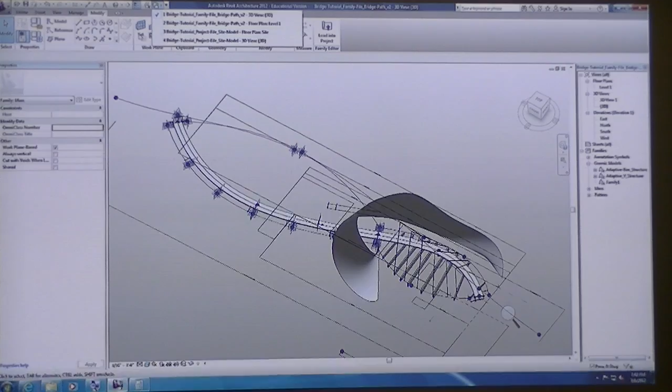A quick workaround: Families new, let's make an adaptive component. Generic adaptive.

And if I look at my bridge, to basically make a pipe along, let's say this top rail for instance, this top rail was made out of 5 points. I had a point here, a point there, another one in the middle, and then one over here, and one at the end. So we need to make an adaptive component that also has 5 points, and this one will be real quick.

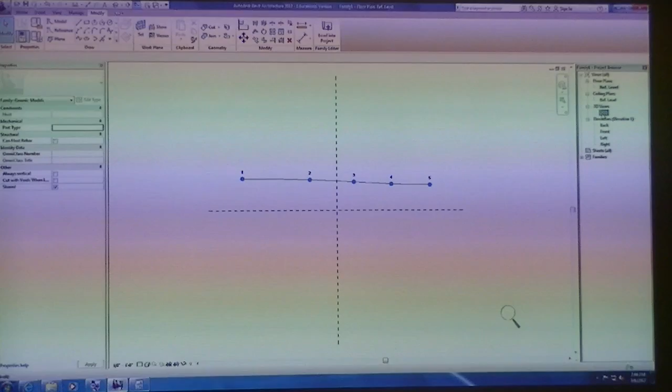It doesn't matter where they are, just do 5 points. I'm going to select them, make them adaptive, make a spline through them, click on it, make it a reference line. And then if I host a point, this is where you can make your pipe structure.

So I can click on circle, pick that reference plane, go back to circle. Right now I'll keep it that dimension. We turn that also into a reference line, make sure they're all references. I can select those and say create form.

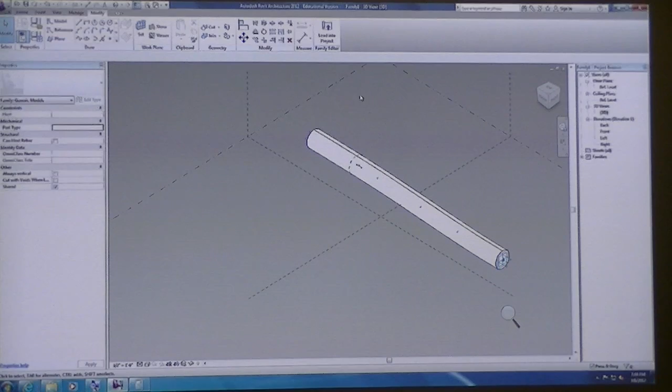Load this into that family. Should have given it a name. And because it's an adaptive point or adaptive component, we can place it. It was called family 1.

Now I'm going to snap to each of these points. And there's my structure that will show up.

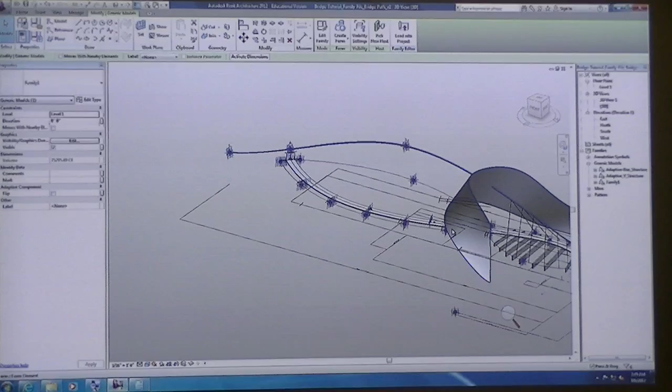Now you can take that one step further, and if you added parameters, just like we did with the adaptive components, you could give it an instance parameter that would change the radius. You'd have to make it an instance parameter, and then over here, set it to equal some parameter that's already set up in this file. And I can do that for each of these different rails, and then when I load this into my Revit project, I now actually have everything looking like a bridge with the structure and so forth.

You notice, because I overwrote it, all my values were back here at 650.